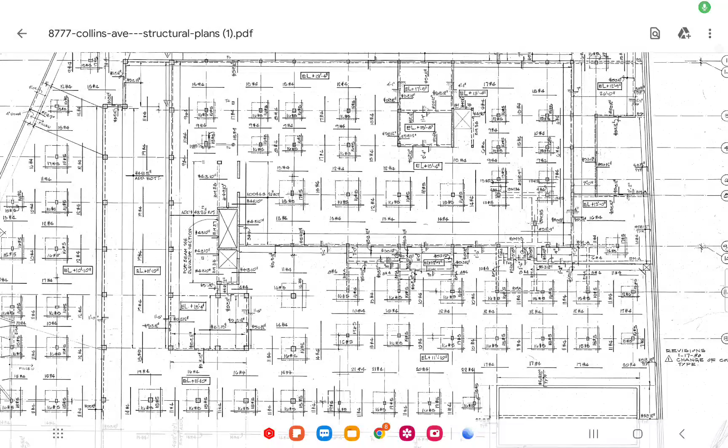Okay, so I've given out hints numerous times, but we're going to go back to shock loading. This should be your energy built up, whatever it may be. But I want you to think about this: a hammer and a nail. What does a hammer and a nail have in common with this building failure?

And I'll tell you an M. What does it have in common with M? This is M. I'm giving you this, you can pause the video anytime you want and try to see if you can figure it out. I'll give you another hint before I reveal it.

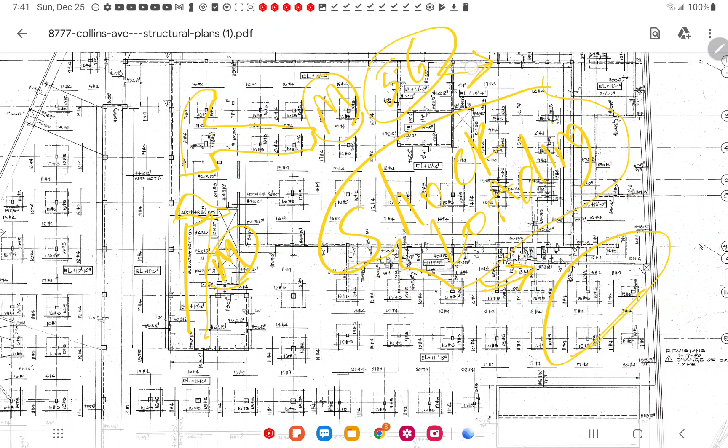Think of the video and what I've always kept telling you about it, that I believe it was a full collapse. The camera went back, grabbed 5 or 6 seconds, whatever amount of video we're observing, and stored that onto the hard drive. Now when we look at the video, most people see what? Pause this video and rethink about what I just said. If you want to try to solve it before I give it up, just pause the video.

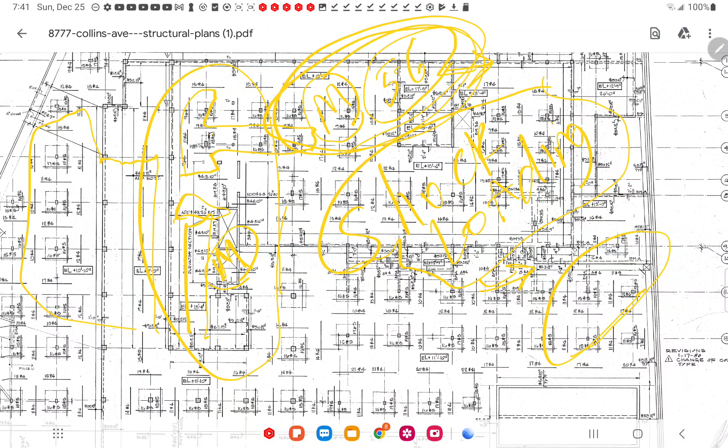All right, what is a hammer and nail? I'm going to go forward now. So what does a hammer and nail have in common? Then I'll go to the video last, the collapse, and see if you can catch on. I'm trying to give you hints before, so you can beat me to it, if you will.

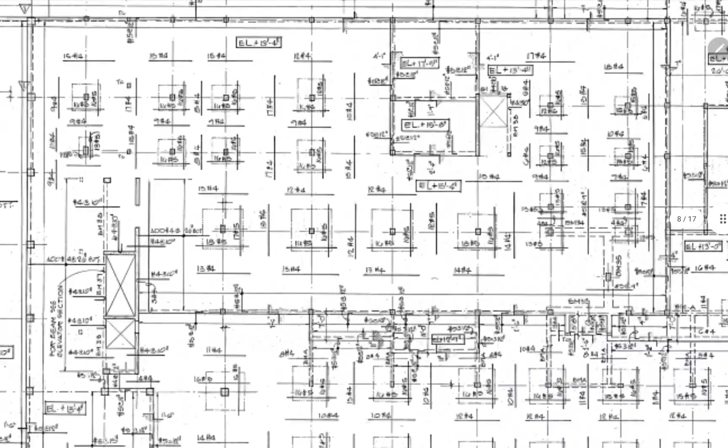So this will be K, L, M. Let's verify that. K, L, M. Okay, this is very interesting. These are G's. Yeah, so these are G's, and you can see the shape of them, and they're identified. But this one is clearly like this.

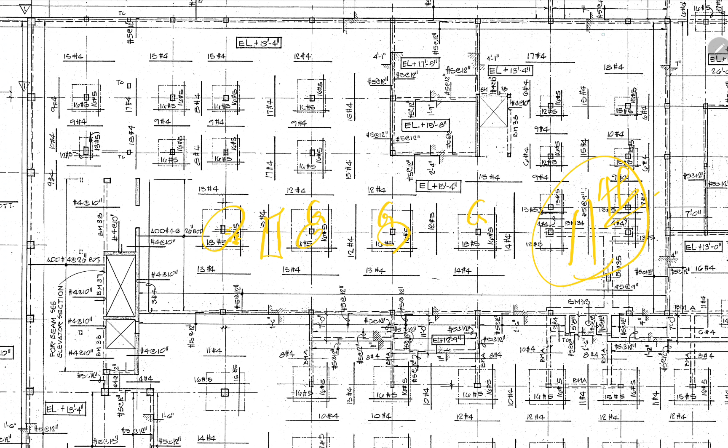Clearly, not by mistake. It's on multiple of these drawings, those plans here. This is the one that goes up to the roof, floor 11, and then we transition to the penthouse, floor 12. But at floor 11, they do a transfer beam type setup, I believe it's something like this. Over to maybe it's there, and it's that one where we look in the sky view.

If you look up there where the air conditioners are, it comes through. Here's a walkway here, and we observe this top view. We see the beam like that, and then the one that goes across here, and then the walkway goes like this. Let's see if I can get this right. I'll have to go further out over the dirt, make that a beam up here, and then cut across for the hallway, penthouse. There's the air conditioning units here, here, here, and here. Let me show you.

So we have this one here, I believe, is our plane. Here's the other column there. We're going to zoom in on it. I think the other one's back here. This goes here, and there's this beam set up like this. And then it has a column also. Let's go ahead and zoom in.

Let's rotate around a bit, zoom out, and we look like we're in line with the G's. Remember, this one goes like this though. All right, so that looks like our G, and this should be our K, flower pot, plant box. So that's our K line. So K, L, M, and you come back to the building to find it.

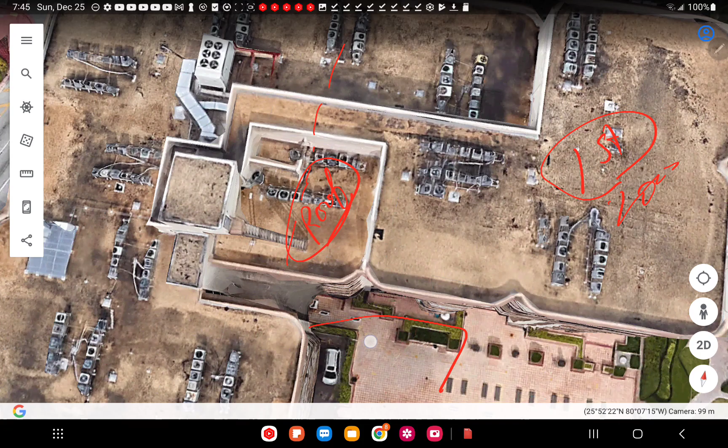And I believe after the deck collapsed, it rattled the building and vibrated through the building, and the roof collapsed first after the deck. You're like, but nobody's saying that. Nobody's saying the roof collapsed first.

So everyone's saying you clearly must be dumb because here's M and we see M buckle, approximately maybe over here by N also, right? So we see M buckle. Well, think about the hammer and the nail again.

So this roof, I'm going to show with the cardboard and reveal here. I don't know if I've already revealed it or not per video part 2, or this will become part 2 and I'll move part 2 to part 3. I don't know yet, you'll know when you've caught up to speed. So when this roof goes down, it hammers this structure. This slab hammers the structure. It folds maybe down to here.

That first initial impact that stresses this building, the load transfers to K, L—it's already on K, L—and M. M decides to be the one to, with the impact and the load, take the shock loading of the structure, and I believe it incorporates some of this when the building starts rotating down.

I have a video on that I've already posted, showing this section below not buckling for some time, showing the K and L. Yeah, that's L—that's the fake one. That's just a planter box there, it's fake, it's not on that line. It's not the K column or L column. When I say K and L, I'm talking about the columns in here, and I just projected out here to make it easy.

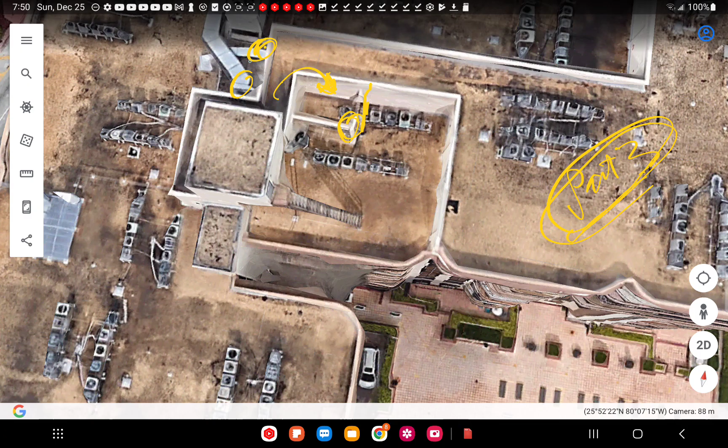So here's our rotation there—it's part 3. So then our rotation, and I'll show this with my cardboard demonstration on that, so this will be provable to you. This will be me trying to debunk myself, and you'll see that no, it's solid.

So when we look at it, we're looking at a video again, and they went back 5-6 seconds, and what we observe just happens to be the timing of the buckling around M—what appears to be buckling of some type over here, jogging down of M, collapsing. At the same time, we observe the roof going down.

Well, just pretend like you can grab another—instead of 5 or 6 seconds, maybe you could go back 8 seconds. You would see the roof go down, I believe, and then that hammer-nail effect driving down on here, all 3 of them. Turns out that M just got up for the task of taking that shock load, that hammer-nail effect.

So that's when we see it, it looks like M driving down, failing at the base, and the roof coming at the same time. Just imagine if you could get more seconds, go back in time, you would see the roof go down first, impact driving. M couldn't take the multiple impacts of the hammer nail effect, if you want to think of it like that. It buckles and fails.

To prove that, I would need more data on M, but we see M is collapsing. Now let me pause it and show you the video again, and reimagine. So now I want you to, as you look at this video, reimagine, going back a few more seconds, and you see the roof go down first, rotation, and the multiple impacts.

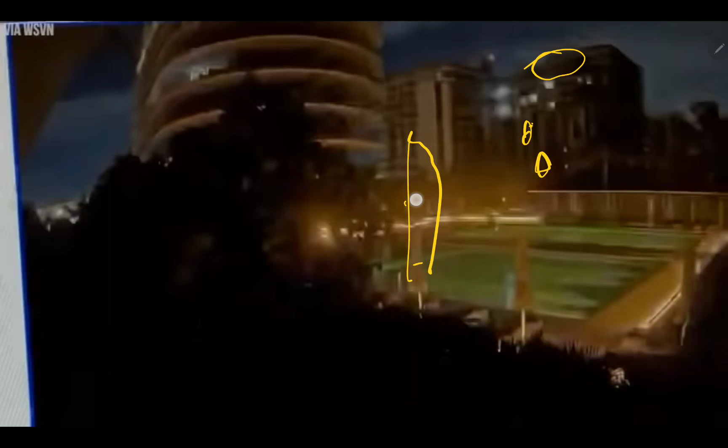So just go to the roof now and just back up in time. Roof is failing, ultimately it's going to pull down. The other one is the other structure to the right more. Start driving this roof, the roofing to the right, and the facade, the front plane, down also. And then we'll see a little slight buckle here eventually, but only in the concrete here. And as you remember, these sausage links, I call them, they're pretty engaged. They didn't buckle. We don't see a buckle in any of the materials we find in the ground. We see floor separation. Let's go.

See, it's above. These guys are still parallel, they're still straight. So that's K, and that's L, I believe. It might be M, I mean it really might be M. I might be off, K might be back here hiding out in the dust there a little bit. I think that's the two windows, so I'm going with the K. I'm willing to move, but that's K. The brickwork block in the middle, L, and M's back here. So these guys are firm.

And now a hammer and nail effect. Here we go, and we got some tearing going on, a lot of debris falling. And eventually we get that roof deviation. And then still, K is perfect. And then it looks like a little buckle between K and L of the block wall system, right there, right where you may see it, right here.

So there seems to be the roof, right? I said I'll get us into the building. Now look, let's do it again. So now I want you to remove your bias about it has to start at the bottom. I want you to pretend like 10 seconds you can go back in time. You would see the roof where it is now. You'd observe right now, because luckily we have it, where K, L, and M, the whole plane there, looks unbuckled. So we can't say it started there if you're looking at it now, and you've got collapsed the roof structure already, and you have no indication of lower collapse yet, besides the pool deck.

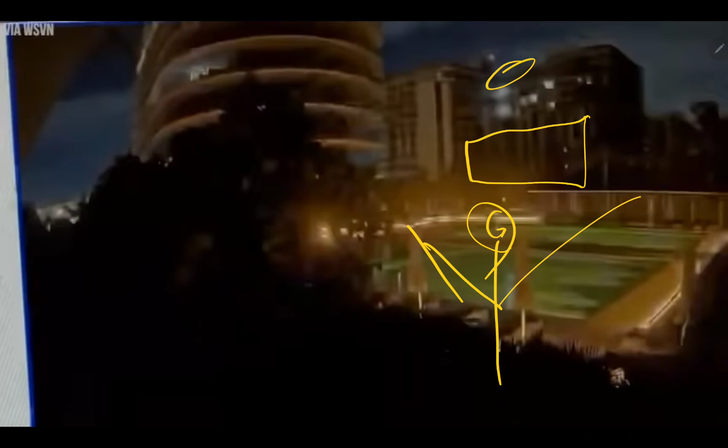So I'm saying it just rattled this guy up here, knocked the roof down, and that butterfly effect right there, based off that G one. And I'll show it to you, the G columns. I'll show it to you again, but this is what I'm stating. Let me let it play again, and I'll show you one thing before I terminate. You see, it's still there. Now there's the buckle, and that's what I see, that's how I put it together.

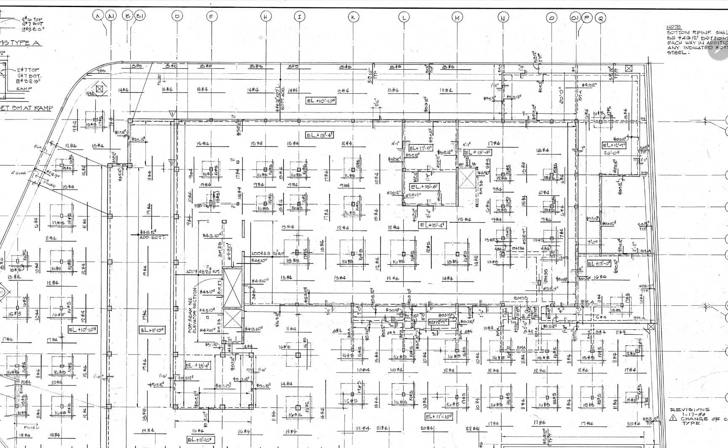So here's K, L, M. K, there's a planar box, L, and M. We see the video, we're into it a few seconds, the collapse has already started. I believe this G is probably what collapsed. That top part started the rotation down, and I can move it over to here a bit. But I like it, I like it in the middle there.

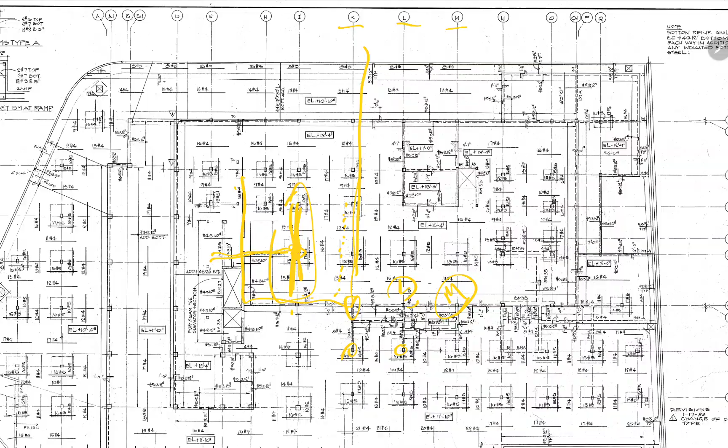Also, what I find interesting is that he really punched out details on this, architect and engineer. If you see here, this is still G. G is supposed to all be the same. I'll show it to you. He put 16 fives here, he put 17 fives there, he put 16 fives here, so these two are the same. 16 fives here, the same. On this one down, he put 18 fives. But these two in the middle, this is L and M, 16 fives. So these two, same, these are not the same. These are 18 fives. So he went up by 2 in this direction.

In that direction, he went up by 2, and in the other direction, he went up by 1. If I knew the spacing here between these two, I'd be able to tell you which way he chose. So it went up by 1 in this direction. This column, I don't see it changing.

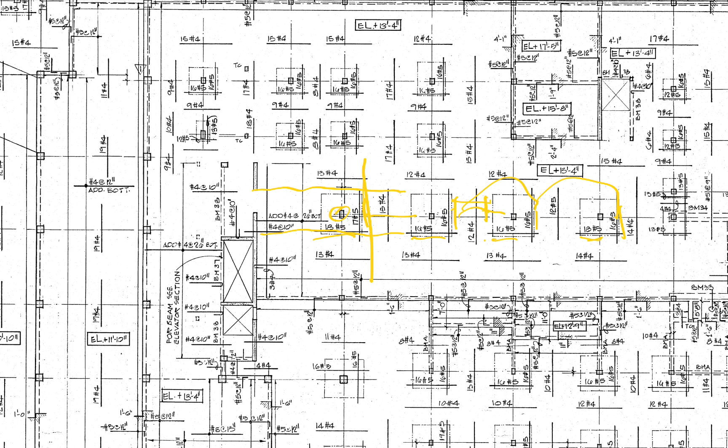But our rattling, we could get the punching shear through. So this is the outer deck, right, that's where it's connected. And you see what I just drew? You see how bad it looks. Let's do it again, so I'm going to do our connections.

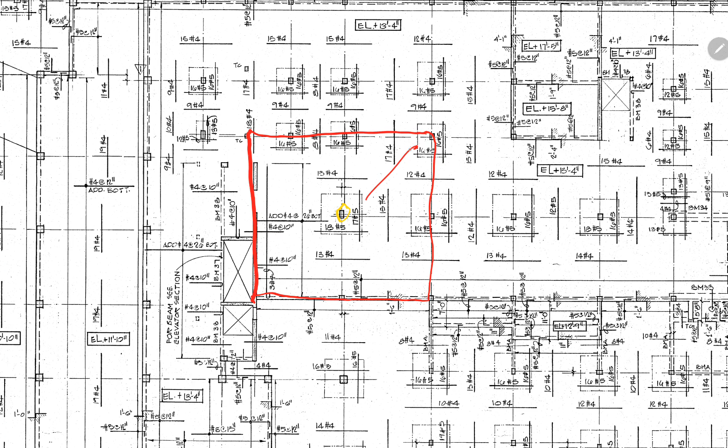And in the middle, I'm going to put this one, hold on. And we'll change that, let's do it again, I'll do it in this color. So now I want you to see that all our entire span there, the tributary areas loading onto the top deck, are loading onto this 1G.

1G. Now, this is significant, this wall here. Remember, the cantilever effect allows for a lot of bracing. And in fact, when it fails, we do see a lot of floor system left behind, right about there.

So this is where it's fractured from here. It would be, so let's look at it as a cutaway. So here's a building, I'm going to do that little cantilever like that. So this one is this. And then I'm going to put a deck back across it, fully over to here - let's say when I say over to here, I mean here, right here.

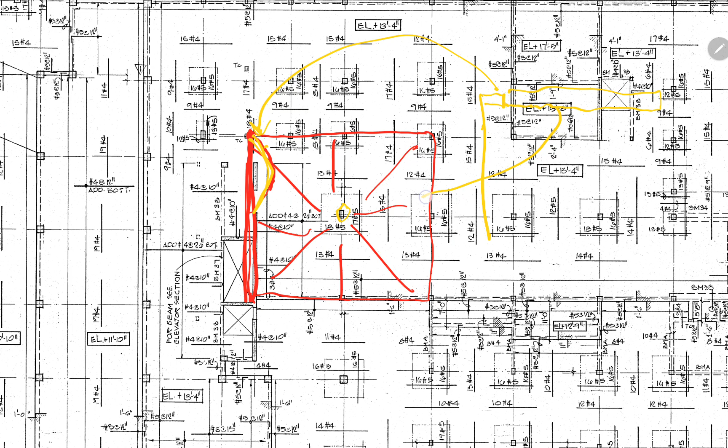And now I'm going to butterfly this like that. I'm going to take some exaggeration here, move that over a bit. When the jet rattles, put it right about G. So let's call this G. And we get punching shear around this one right here, and now we get the progressive collapse.

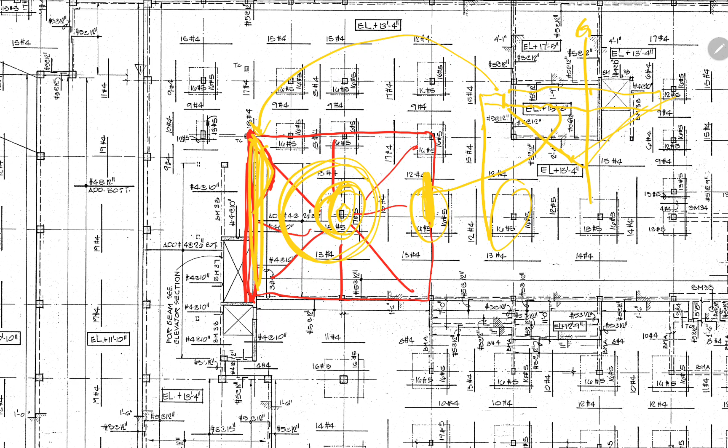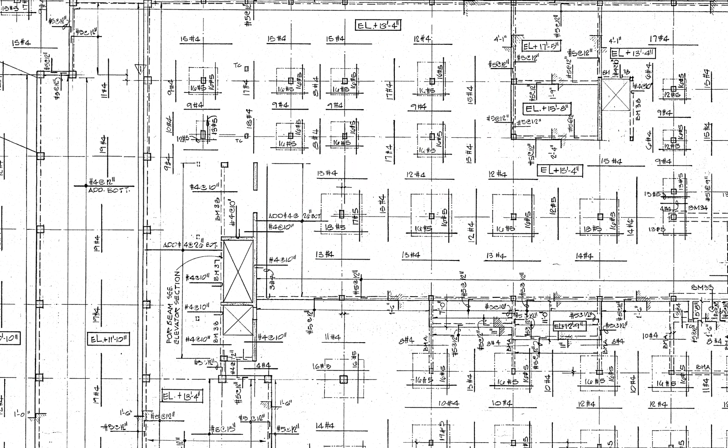And then these are 12 fours. Oh look, 13 fours. These are all the same across the front. I'm sorry, let's just stop there then. 13 fours, 13 4 rebar, 13 fours. Outside the wall there, inside the wall there, he used the hooks.

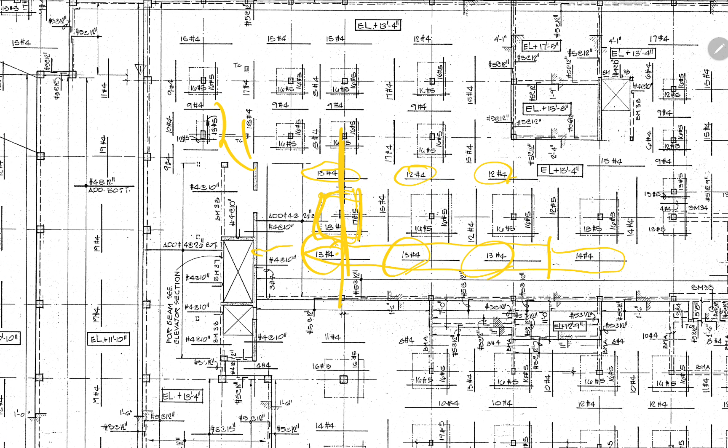And I think he would have, for engagement - sorry, I'm looking at his other note there. I'm going to zoom my eyes in and out for a second. Okay, so this is where I believe we get some punching shear going on, but it develops itself like that in the butterfly effect, and I'll show that because of the ductwork. That's part 2, and then I'll do the model part 4, I think.

So it looks like here. Let me zoom this in for you so you can see the columns first. So I want to show you the column here, here - these are columns. This is the wall ledger system, and so I'm going to come back here. This is where that fracture exists. It stayed, I'm going to do that.

So let's take a look at that again. I'm going to draw you in like this. I'm going to come across - I think it's over to here. Go like this, and I'm going to come back across. Porch is a cantilever, I'm going to put a column here. This is our punching shear area, I believe. And this is a piece of shelving that stayed, some concrete.

And so this is column, and ledger walls where I care about here. I'm observant of that. Alright, so this is a punching shear location.

Punching shear and location of first failure, main building failure, I think. First, this building failure, this tower. First area. Okay, so I'll do a plus or minus on that of about 3%.